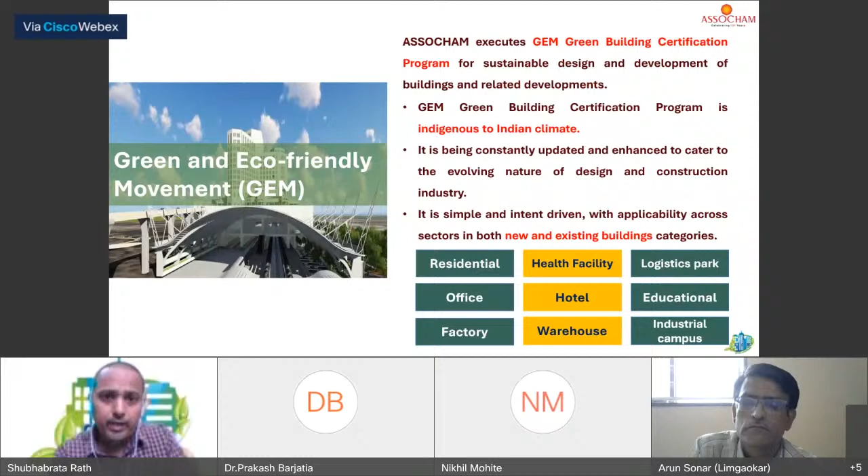It is indigenous to the Indian climate. It is updated constantly for Indian needs. It is simple, intent-driven, with applicability across all the sectors. You can say residential, healthcare facilities, logistics, education, hotels, warehouses, all kinds of new or existing buildings. Why are we trying to do it? What is the impact of energy in it? Okay, I will come to that part in a while.

Compliant with BEE ECBC. ECBC is the Energy Conservation Building Code. It's an Indian indigenous code, a very good guide for all of us that we developed. And with the 2017 edition, which is the latest edition of it, and the NBC, the National Building Code 2016, we are making all of these implementations in the green building sector: sustainability, energy and water efficiency.

You can see it is prominent in the second part. Fire and life safety, more green area, human comfort, fresh air. Even if you are talking about fresh air, energy has a part in it, directly or indirectly. Indoor air quality, same thing. Even daylight and energy have a connection. So energy is everywhere. In the United Nations SDGs there is a lot of emphasis, and GEM is being continuously improved to align with the United Nations SDGs 2030, and energy is a part of it.

The GEM green building advantages: like I told you, it is an indigenous program by a century-old apex industry chamber. GEM is the first indigenous program based on ECBC and NBC. It is an affordable certification program, at least 30% less than other programs existing in our nation right now. With sustainable buildings, if you're paying something extra, that can be recovered in 3 to 4 years, and the additional cost will be 6 to 10 rupees per square feet maximum. And there are regular interactions between GEM and project teams, even post certification. That's what we have added, and that's what we are committed to for everyone going for this certification.

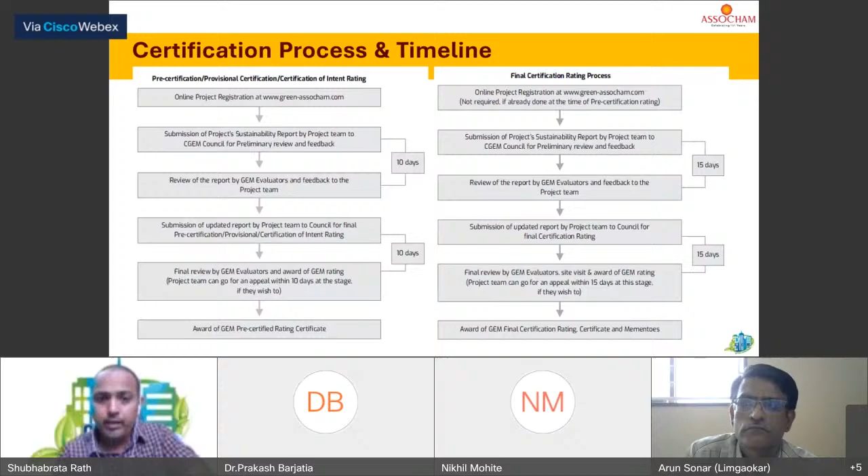It is listed by CRISIL among green building rating agencies. You can see the GEM certification program, and we have GEM level certifications in terms of different requirements, GEM 1 to GEM 5. There are a lot of principles in our program which are directly related to energy audit and commissioning. So we recognize energy audit as a need of the hour. That's why the ASSOCHAM GEM Green Building Certification Program has been empowered with Rajasthan Building Bylaws for extra FAR incentives, and some other states are also coming up in the near future.

There is healthcare, a green school, the land port terminal at Kartarpur, and it's not only a diversified portfolio in terms of types of buildings, it is also diversified in terms of locations in India. We can do that everywhere, because energy is not confined to cities only; it goes into all the details of our life, all sectors and places in all the states, and even villages. We can implement side by side, slowly.

And going towards the energy audit platform, we can develop throughout India. It is not only for any particular cities as of consumptions. So we deliver this plaque and certificate for GEM compliant projects.

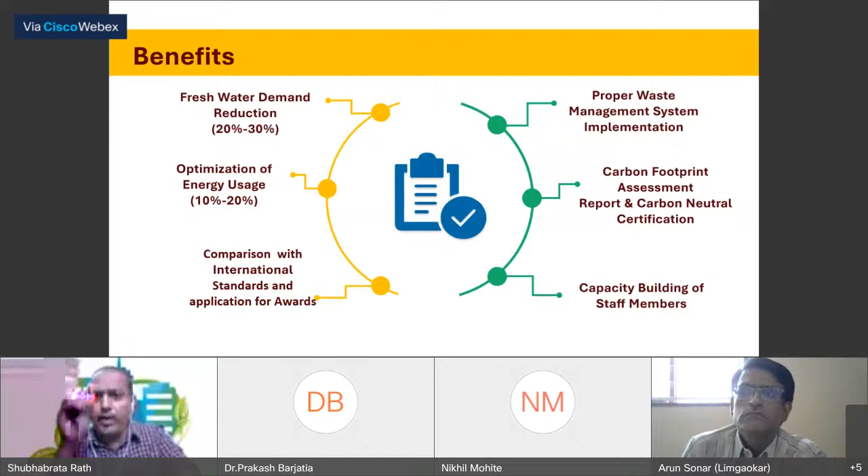Energy auditing is a much needed thing. Our keynote speaker and other eminent speakers will elaborate more on it. I am just trying to make a ground for it. So we have the benefits of all the audits, not only energy audit; any sustainability audit we call a green audit for universities. In the green audit, we have waste audit, water audit, carbon footprint audit, and energy audit. All this helps in certain ways, tangibly and non-tangibly, right?

So we have a pledge. PM Modi made this pledge: let us all pledge to create a green and environmentally sustainable country. Of course we should, and that's what we're trying to get at.

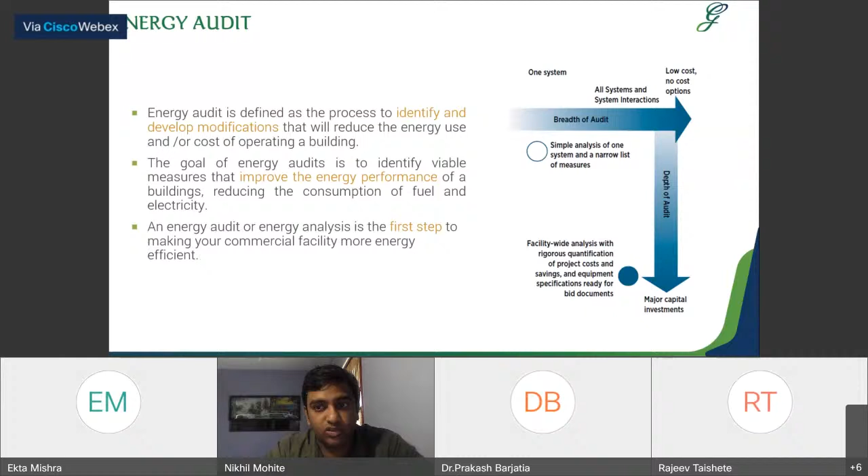And at the end of the energy audit, we try to find the conservation measures, and these conservation measures are normally low cost or no cost options, or maybe capital intensive. So the energy utilization index: during the energy analysis of the buildings, we try to get the historical data of the building, and we try to understand how the energy consumption of the building is. And for that, to understand the historical performance of the building, we use the energy utilization index, which is against the energy consumption.

We try to use influencing factors such as square meters of the building, the factors which have an effect on the energy consumption of the building, such as outside temperature. And we try to map the energy consumption of our residential building against this influencing factor. That is called the energy utilization index. So when we say that buildings have the same energy utilization index, that means the two buildings are compared with respect to the climate and with respect to the square footage of the building. So these are, for example, two energy utilization indices we are using in comparing the two buildings, and we can say who has more energy consumption.

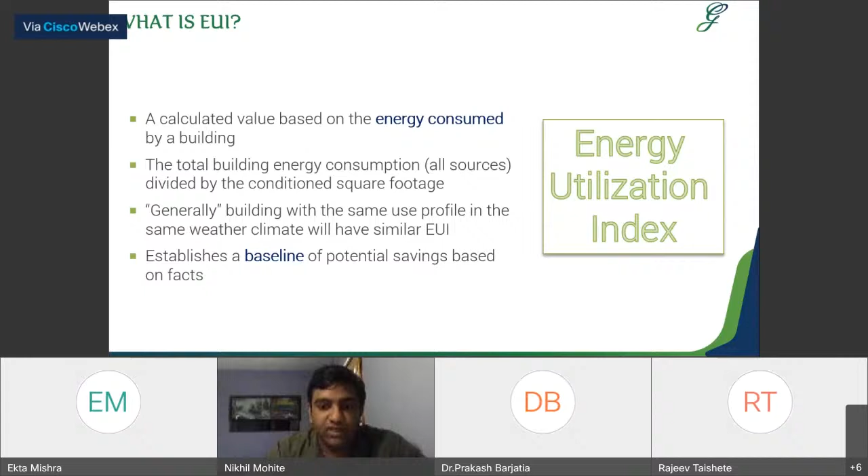So in this example, the building which has the higher energy utilization index can be set as the energy baseline, and then we can start identifying the potential savings with respect to the baseline. So to prepare the energy baseline, we use these energy utilization indices for the buildings. So, key elements of any energy audit: the first one is benchmarking and analysis of the historical data. And the second one is breakdown of energy use and analysis of the end uses.

So in the initial steps of the energy audit, we try to understand the type of the building, the principal use of the building. If the building is used for 8 hours or it is used for 24 hours for residential purposes. What are the different types of energy sources that the building is using? What are the different types of energy uses that the building has? What are the different costs associated with the energy uses? So these kinds of questions we come up with when benchmarking and analyzing the historical data, and then we try to understand the design conditions of the building

and the actual operations. So we try to compare the design conditions and the actual operations. We try to understand the operation and maintenance procedures in the first step, then compare it with the baseline. So this is the first step, benchmarking and analysis of the historical data. Then we try to break down the energy use, and in this step we categorize the energy consumption with respect to our on-site observations. So the categorization of the energy usage could be the percentage contribution of different categories such as lighting, HVAC, domestic hot water, laundry, food preparation.

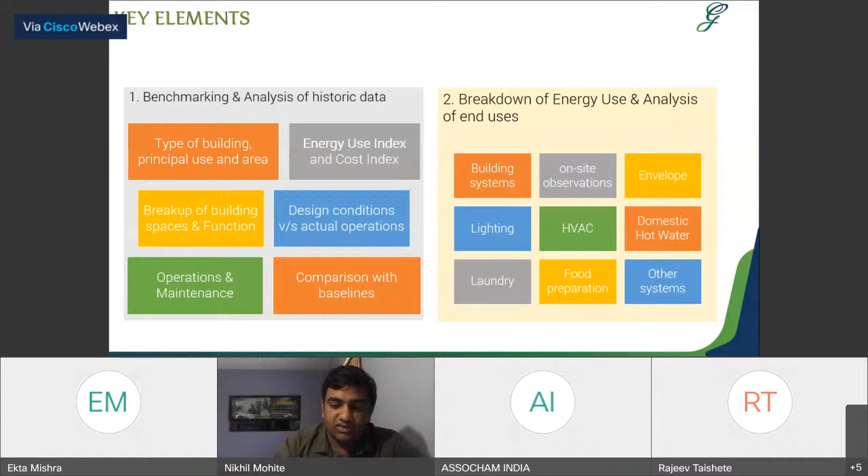We try to analyze, break down the energy usage of the building. And the third aspect is energy audit, engineering and the economic analysis.

So once we have identified the historical data, then we have identified the breakdown of the energy consumption, we go to the data analysis. After analyzing the data, in the energy analysis we try to get information about the present energy use, and we also take into consideration the cost of the energy sources. So our ultimate aim is energy conservation, and we try to estimate the energy savings with respect to the energy efficiency recommendations.

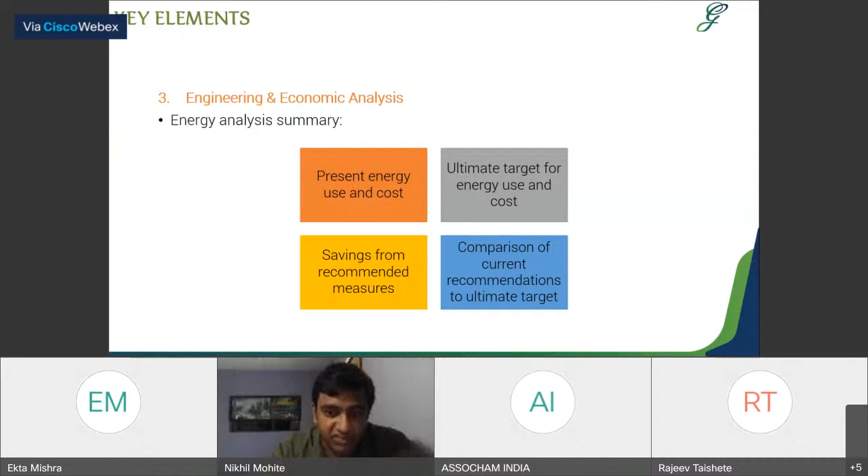So there are several frameworks available for conducting energy audits, such as ISO, International Standards Organization, the Bureau of Energy Efficiency from India, and ASHRAE Building Energy Assessment Professional standards. These standards have their own guidelines for conducting energy audits, which we can use.

For example, in the ISO 50001 energy management system family, the separate standard ISO 50002 has given the guidelines regarding conducting energy audits. So there are several steps which we can follow to conduct the energy audit as per ISO 50002.

Bureau of Energy Efficiency has also given certain guidelines regarding energy audits. The framework which Bureau of Energy Efficiency has given is that they have identified certain designated consumers, such as the manufacturing industries. Several sectors include cement, steel, railways, fertilizer, iron and steel, pulp and paper. These sectors have been identified as the major energy consuming sectors, and the leading industries in these sectors have been identified as designated consumers, for whom Bureau of Energy Efficiency has set goals.

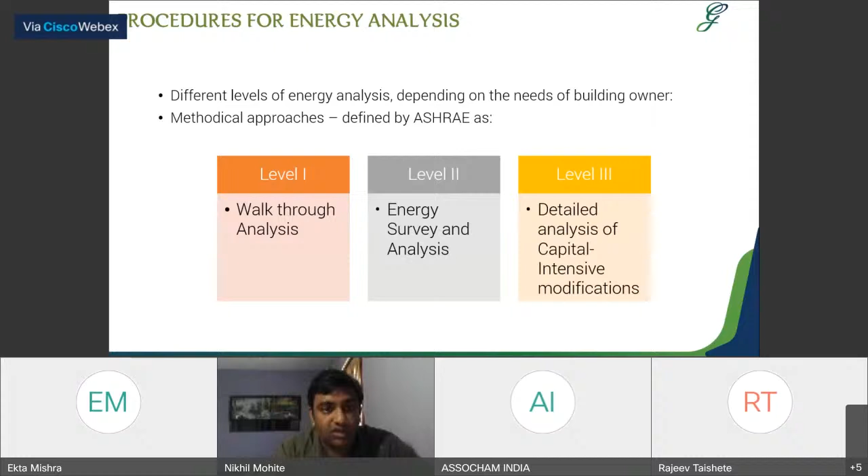But level 1 gives the input that can be used as an input to level 2, and level 2 inputs are used in the level 3 energy audits at ASHRAE. So we'll try to understand in detail what level 1, level 2, and level 3 are.

So as I mentioned, for each level, the energy audit process is the same. Initially, we will try to review the utility data before visiting the site, examining the utility data regarding energy consumption, mainly from energy sources used in residential buildings such as electricity or diesel consumption.

We'll try to get this information for as long as 3 years to understand the energy consumption pattern of the building. The more data we have, the more we'll understand the pattern of energy usage and the changes happening in energy consumption on a broader level with respect to energy sources.

Before visiting, we'll try to get information regarding the single line diagram or the building's systems diagram, and understand how the building was designed or its current usage. With respect to the single line diagram, we'll try to understand the energy sources, energy consumption, the energy consumers at the demand side, and how energy is distributed in the building.

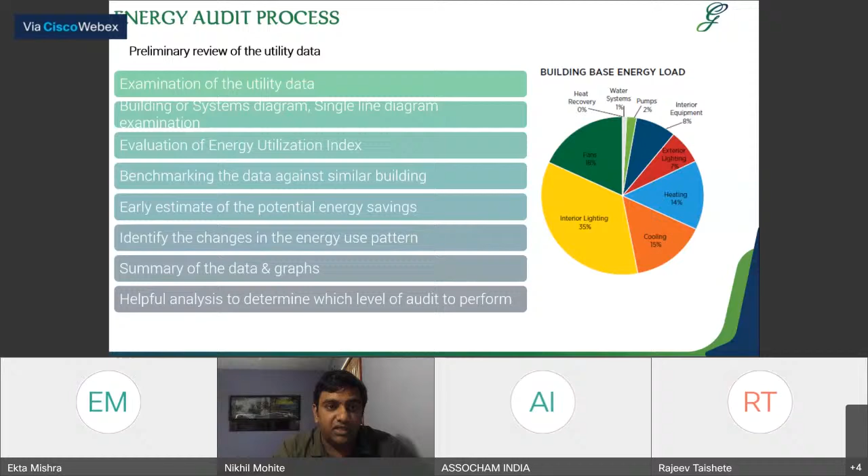So the second step in each level is the site assessment. Once we are done analyzing the initial data, we visit the site, and in the physical assessment of the facility and operations, we try to meet with the key operations and maintenance staff.

While doing the site assessment, whether you are in level 1, level 2, or level 3, the complexity and depth to which you conduct the site assessment depends on each level. Level 2 will be more on the equipment side, and we'll try to get a different operational view on the equipment usage.

We'll try to collect data with respect to energy consumption, such as doing energy measurements for the equipment, and we'll collect the data in this way. While doing the site assessment, we also get the construction details of the building envelope.

Then when we are collecting data for the chillers, pumping systems, or AHUs, we get data such as the rated capacities of the systems. Then we try to understand the control methods - what are the control methods being used.

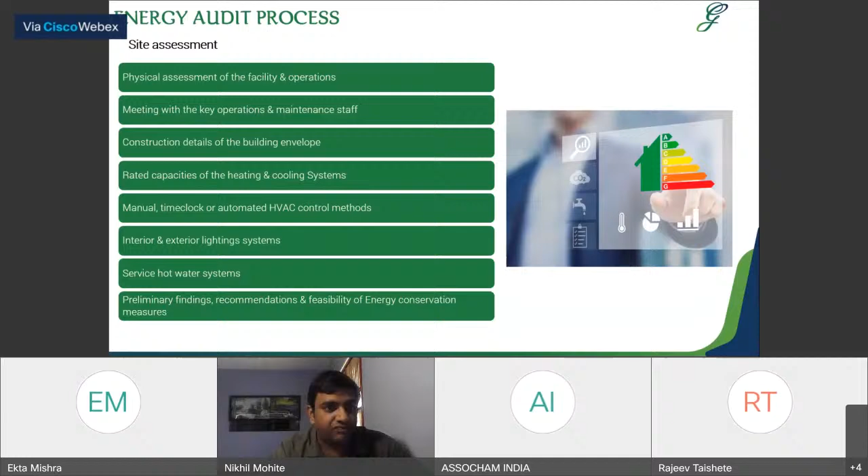So after review of the utility data and site assessment, we go and do the data analysis. Once we have the measurements and the data monitored, in the second step we come back and do the data analysis and try to find out what is the performance of the actual building.

This is related to the performance of the equipment that the building has been using. So what we do is try to understand the performance of the chillers, pumping systems, or the fans, and we try to understand the efficiency. We calculate the efficiency of these equipments and compare it with the rated parameters to see what exactly we are getting.

So the data analysis in energy audit is nothing but what is coming in and what is going out. For most equipment, what is coming in is the electrical energy. For a pumping system, what is going out is the hydraulic power. For fans, what is coming in is electrical energy, and what is going out is the fan power, or air power.

In this way we can analyze the equipments and calculate their efficiencies, compare them with the rated parameters, and try to find out different ways of conserving energy with respect to these equipments.

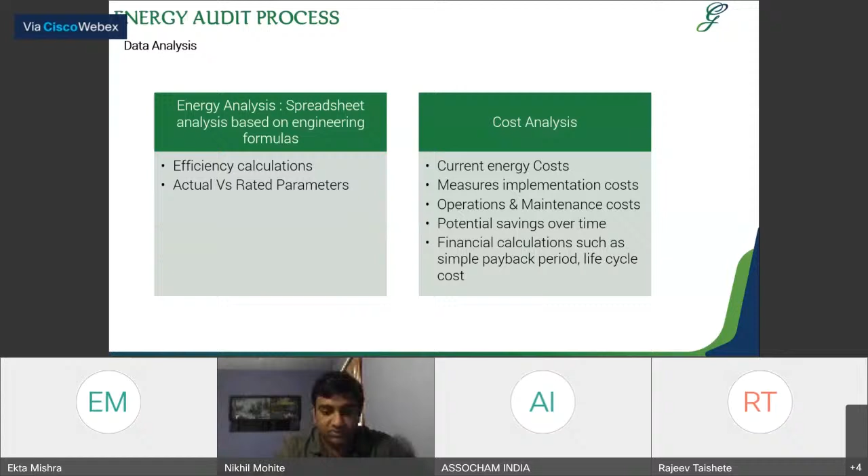The last step for the energy audit is preparing the energy auditor's report. Once we are done with the data analysis and preparation and identification of energy efficiency measures, we put everything into our audit report.

We talk about the future, what kind of steps the building owners have to take to meet the energy saving and financial goals. So we give a summary of the building's current condition and energy use, which comes from our initial preliminary analysis.

Then we discuss the list of recommendations, energy saving recommendations with respect to low cost and longer term energy efficiency measures. We also discuss monitoring of the energy consumption and utilization in the future, and how the building can monitor that energy consumption.

We have seen in buildings that many times they are only monitoring the energy consumption, and there is no real system at all. Whatever system the building has in place for collecting data, they might not have automated data generation, but they have personnel working on collection of the data, so they are only monitoring the energy consumption.

They are collecting the data, and they have data for the last couple of years or three years, but there is nothing done with it. They have not done any energy analysis with respect to that generated data, and have not come to any conclusion, just because some company advertised them about doing the data monitoring, and they have been following this.

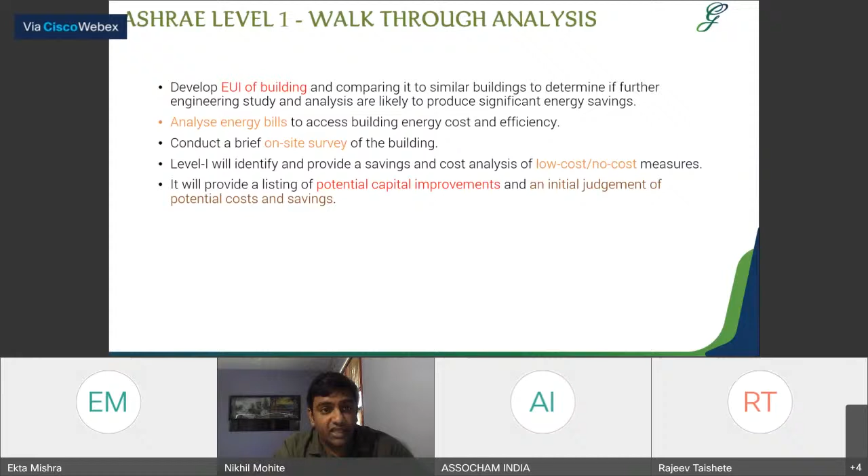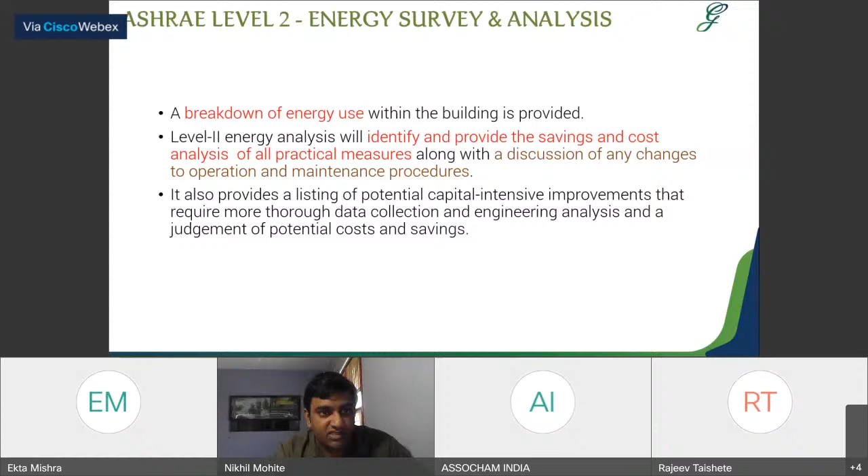Here we will not include, but just mention, the capital intensive projects which need more capital and require more data to analyze to establish that there are energy saving opportunities. This input from ASHRAE level 2 we'll use in level 3. Level 3 is the detailed analysis of the capital intensive modifications.

Once we have identified a few capital intensive modifications, we'll try to monitor the energy consumption of certain parameters, certain equipment with respect to the identified energy conservation measure, and understand the load, the energy consumption pattern, whether it is changing with respect to the load, or how the energy performance of the particular equipment is. That's how we will do the capital intensive modifications to realize the energy saving opportunities.

We'll try to gather as much data as possible, do the monitoring for a certain period of time, and then analyze the data. Then we will come to the cost benefit analysis, and do the cost and energy saving calculations.

So this is a brief summary of the level 1, level 2, and level 3 audit reports. The level 1 audit report is only a walkthrough survey. It has an executive summary, brief description of the facility, scope of audit, preliminary analysis findings including benchmark and end use results, only the low-hanging fruits such as no cost and low cost energy conservation measures, and potential measures for further consideration. Here we only mention that there is a potential, but further study needs to be done.

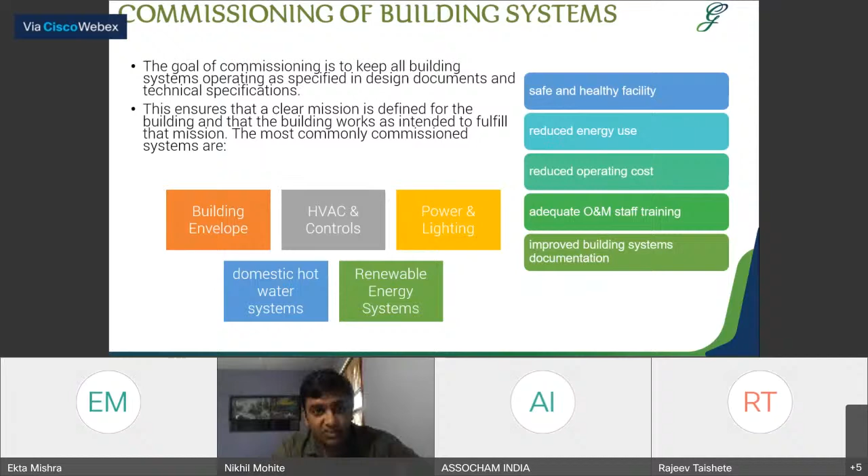So why do we require commissioning of the building systems? Because it reduces the energy use and the operating cost of the building. It also keeps the staff working inside the building, or the people living inside the building, safe and healthy. And it also improves the building system documentation. Sometimes, once the building comes into use, after a few years there are lots of changes, and no one has really made changes in the documentation. When we do the commissioning of the buildings, we come to know the current scenario of the building against the design scenario a few years back, and we can change the documentation.

So the commissioning process mainly includes different types of commissioning: initial commissioning, ongoing commissioning, and retro-commissioning. The initial commissioning is normally done for newly constructed buildings. It starts with commissioning planning, first with the owner's project requirements. The owner gives the requirements to the design team, they prepare the basis of design, and then the actual process starts. The contractor comes into the picture, they order the equipment that is required, and we do the startup procedure.

Then the commissioning provider comes into the picture. The commissioning provider will review the design and the installations, and will also ensure the startup of the components and systems. Then they will do the performance testing, whether the equipment is running accordingly, and prepare the system operation and maintenance manual. They will train the personnel and see if the system is responding to seasonal changes. They'll do the first operational review after 10 months of operation, and it will go into ongoing commissioning. So the initial commissioning is done mainly for newly constructed buildings.

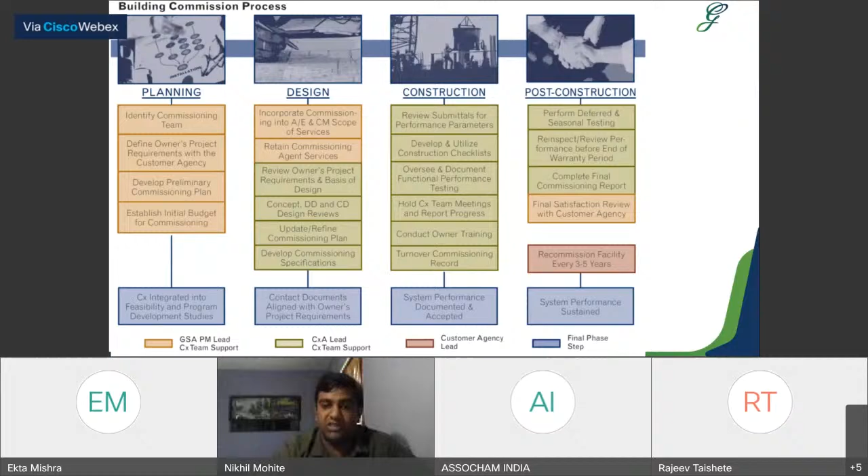So why should we go for the commissioning? Because as we use the various equipments such as motors, the fans, and the chillers, etc., they will wear down with use, and there will be some sort of unbalancing or misalignment, causing various problems such as vibration and noise. The controls and the sensors will also deviate from their intended use as per the design. And over the years, we also need to see whether they are working properly and proper controls are given to the sensors.

If the building is old, as old as 10 years, there will be many changes in the building with respect to the ducting, for example, and we also need to see if the changes in the building are included in the documentation. And over time the indoor air quality issues can worsen, providing an uncomfortable environment for the occupants. This is not good for the benefit of the company when the indoor quality issues are not taken care of. So such kind of issues we can also take care of

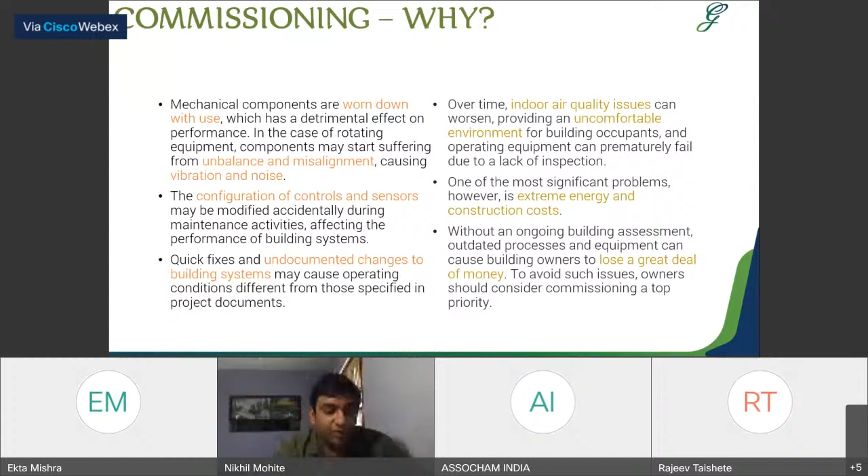Then we'll start preparing the operation and maintenance manual. We'll train the operation and maintenance personnel with respect to the commissioning output and how the system should be running. After this, in the first year after construction, we'll do the seasonal commissioning as well, whether the systems and the equipments are responding to the seasonal changes.

And in the post-occupancy, we'll try to do the operational review after 10 months. And this will be the end of our initial commissioning. So this initial commissioning will be the input to our ongoing commissioning.

So in the first year of operation, the systems that we commission during the initial commissioning, the retro commissioning or the ongoing commissioning are mechanical ventilation systems. We'll see the ductwork cleanliness, whether the insulations are in place, and the operation of the AHUs and outdoor units, whether they are performing as intended. Then we'll try to understand the operation of exhaust and supply fans.

On the cooling side, we'll try to understand the performance of chillers, cooling towers, pumping systems, window air conditioners, split air conditioners, VRF systems, and precision air conditioners in the case of data centers. Heating systems in residential buildings have boilers or heat exchangers.

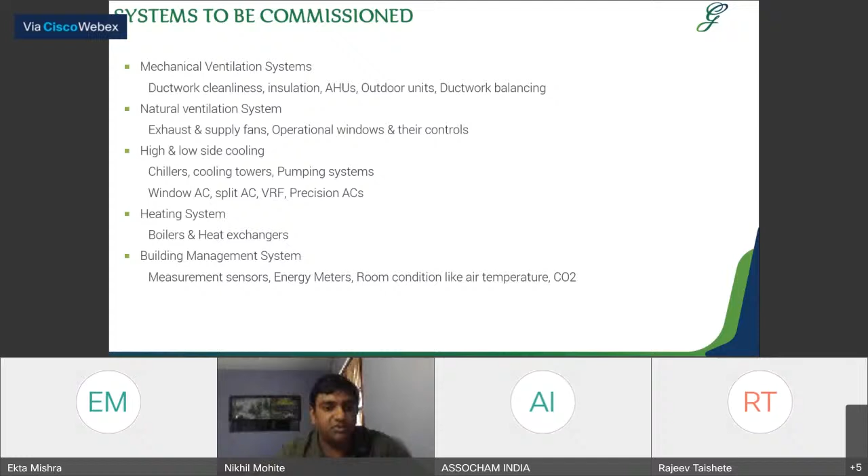As mentioned earlier, the initial commissioning activities: the owner's project requirements, then we identify the key performance indicators. Then the basis of design is prepared. Then the team will nominate the commissioning provider, who will do the commissioning planning. Then the data metering will be done. After the contractor submittal review, installation and inspection of the system components will be done.

Once the startup is done, functional performance testing is carried out. Various issues are identified, whether the equipment is working as per intended use, and once they are rectified, the commissioning provider along with the contractor will prepare the operation and maintenance manual and system operation manual. Then they will train the staff, and seasonal commissioning activities will also be carried out. There will be one operational review after 10 months of occupancy. So that was the initial commissioning.

Then we'll go for the retro commissioning. Old buildings which are more than 10 years old and were never commissioned, as we discussed before, what can they do? For them, retro commissioning is one way to identify the changes and whether the intended use of the equipment is still there. If there are any changes in the systems or equipment, these could be included in the documentation also.

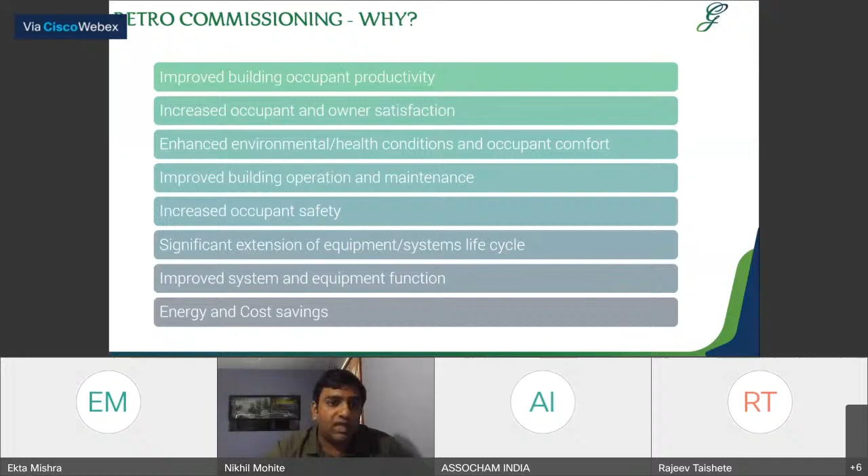The third is the ongoing commissioning. This starts after the initial commissioning, after a few years. The ongoing commissioning is more about the data collection, and this is based on ongoing collection and analysis of the energy data. So the data metering step which we followed in the initial commissioning comes in handy for our ongoing commissioning. The existing building automation system generates a lot of data, and this data is analyzed in ongoing commissioning to reduce the number of errors being made.

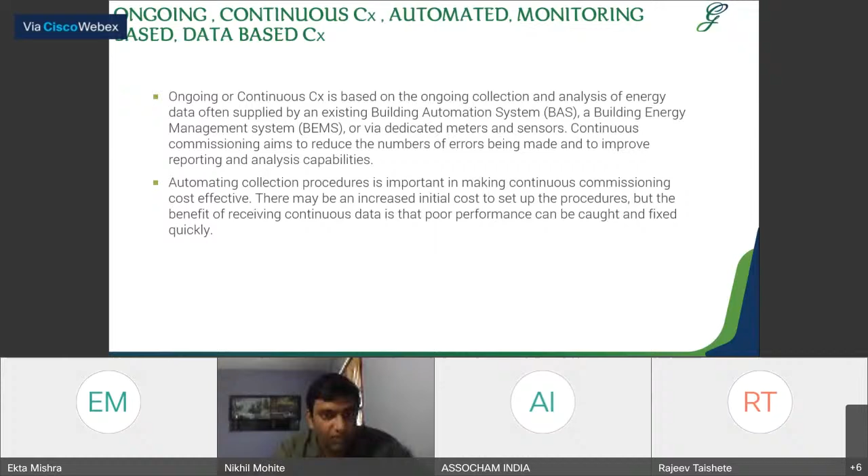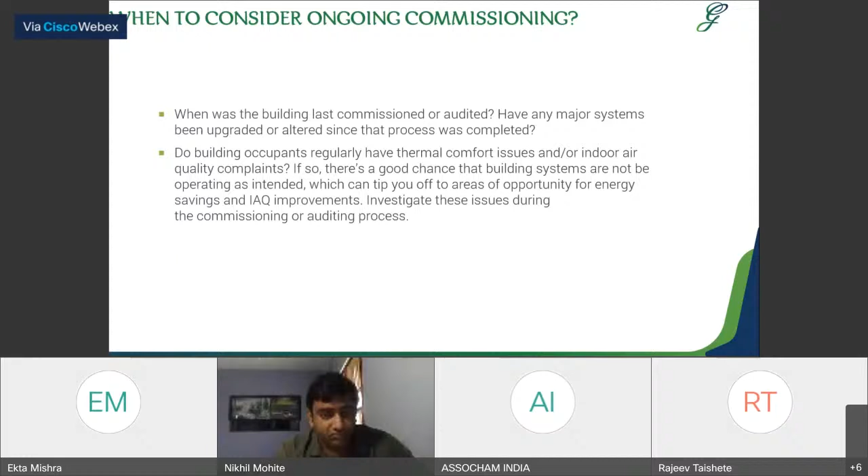So when to consider ongoing commissioning? When was the building last commissioned? Once we do the initial commissioning, and then after a few years we have not commissioned the building, we can consider this option. If there are many major system upgradations or alterations since the process was completed, and there have been any issues identified by the occupants, and they are continuously giving complaints. After doing the initial commissioning, if there are any thermal comfort issues or any complaint issues from the staff, there is a chance that the building is not operating as intended, and we can investigate these issues during the ongoing commissioning.

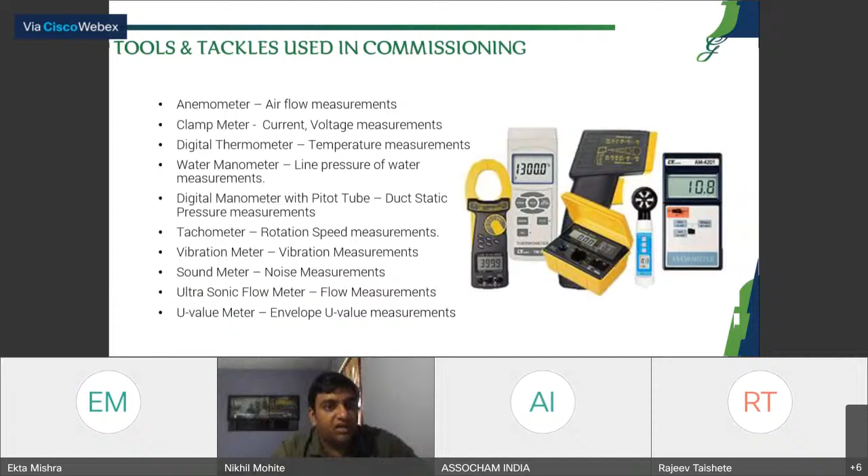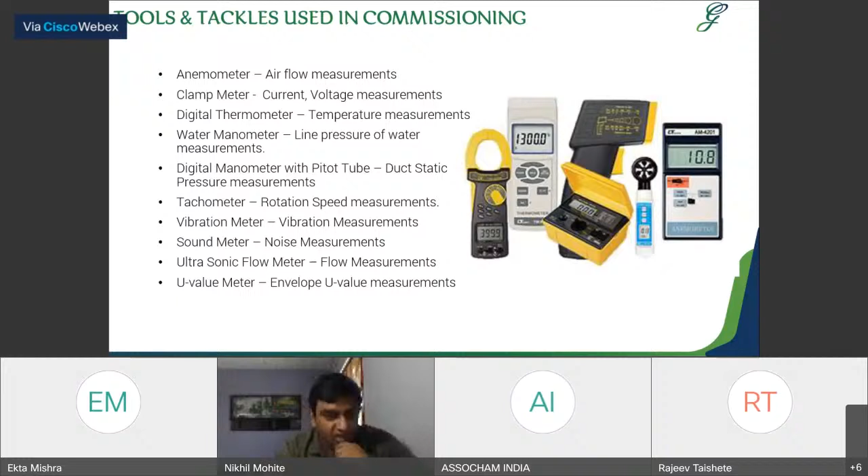The various tools used in commissioning are very similar to an energy audit. To conduct airflow measurements, we use the anemometer. For analyzing energy consumption, for measurement of current and voltage, we use a clamp meter. For temperature measurements, for the chillers and cooling towers, etc., we use a digital thermometer. To understand the pumping systems, we use water manometers to measure line pressure. We also use the pitot tube to understand static pressure measurements. Then a tachometer to measure the rotations of the motor, etc. And to understand the vibrations of the various equipment, we use a vibration meter.

The commissioning agent is the commissioning provider, which has a bigger role in the commissioning process. From the initial stages of the pre-design phase, commissioning agents are part of the process. They review the construction documents, comment on the construction submittals, and review the construction on the field. So they also participate in the processes.

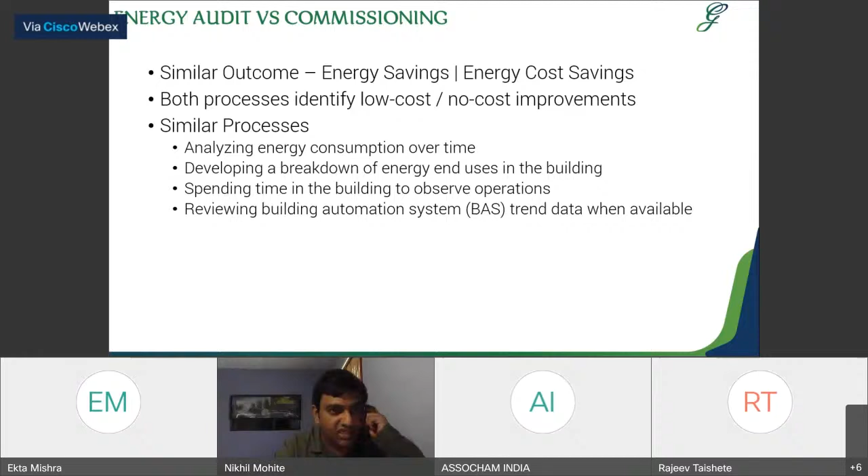So we'll go to energy audits and commissioning. What are the differences? First, we'll talk about the similarities. We have a similar outcome while conducting the energy audit and commissioning: energy saving and energy cost. Both processes identify low cost and no cost improvements. The process also includes similar steps such as analyzing energy consumption over time, developing a breakdown of energy end use in the building, spending time in the building to observe operations, reviewing the building automation system, etc. So these are the similarities between energy audit and commissioning.

The main difference between the energy audit and commissioning is the functional testing we do with respect to the instruments. This is something we do not do in the energy audit. When we are doing the functional testing of certain equipment, we want to see whether they are working as intended, whether the blowers are turning on or off with respect to the temperature inside the building. When we consider an evaporative cooling system, for example, if there is a pumping system pumping the water inside it, whether it is responding to changes in the temperature inside the building. Such functional performance testing we do in the commissioning process.

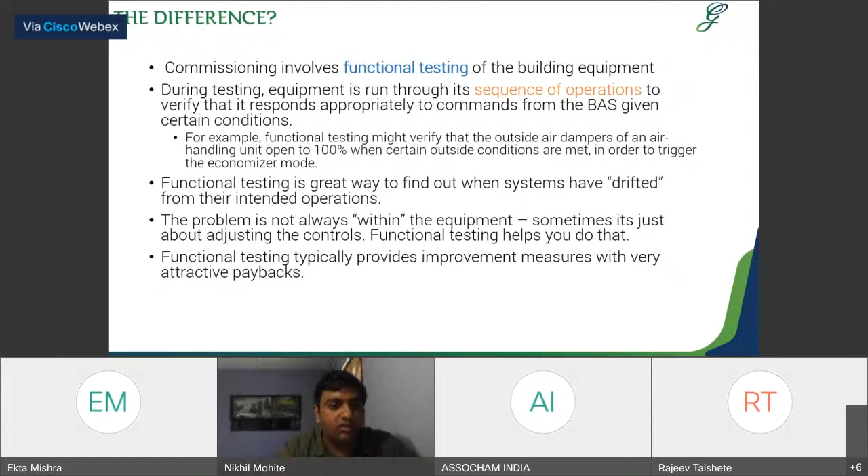So the objective of the energy audit and the retro commissioning is the same: identifying cost-effective upgrades. In retro commissioning, we try to understand whether the systems are performing at the intended level of performance. The primary focus during energy auditing is identification of projects which will generate energy savings. In the commissioning process, we try to understand the processes, building controls, and operational measures, and whether they are giving the output which was intended.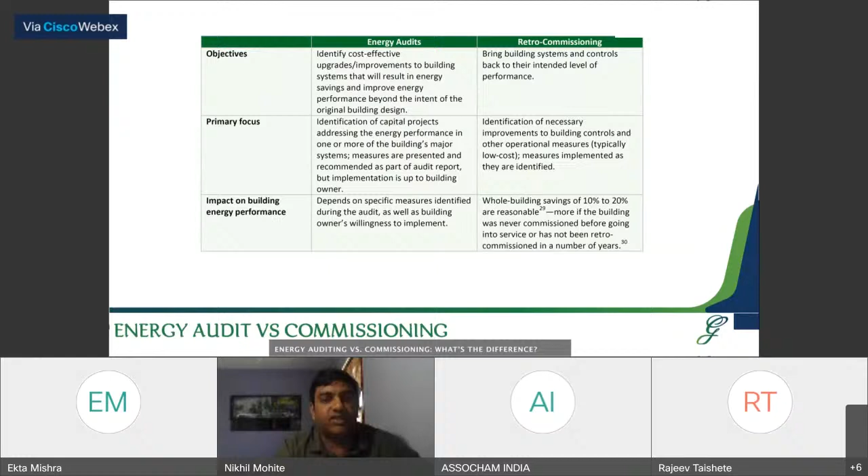In the process of energy audit versus commissioning, the steps we follow are very similar, although the energy use breakdown is more important with respect to energy audit, and not so much importance in the commissioning process. Capital improvements are a requirement of our level 3 energy auditing, but that is not required in the commissioning process. System sequence of operation testing, system functional testing, and data and trend logging are more important in commissioning, where we check whether the controls are operating as intended.

So I'll go to the case studies. One case study of fans or blowers: how we conduct the energy audit for the fans or blowers.

When conducting the energy audit of the fan, we try to understand the performance parameters of the fans or blowers. To come to a conclusion about their performance, what we measure in the field is, as we discussed, what is coming in and what is going out. In case of fans, that's the air power, and to understand the air power we have to measure the airflow inside the fan.

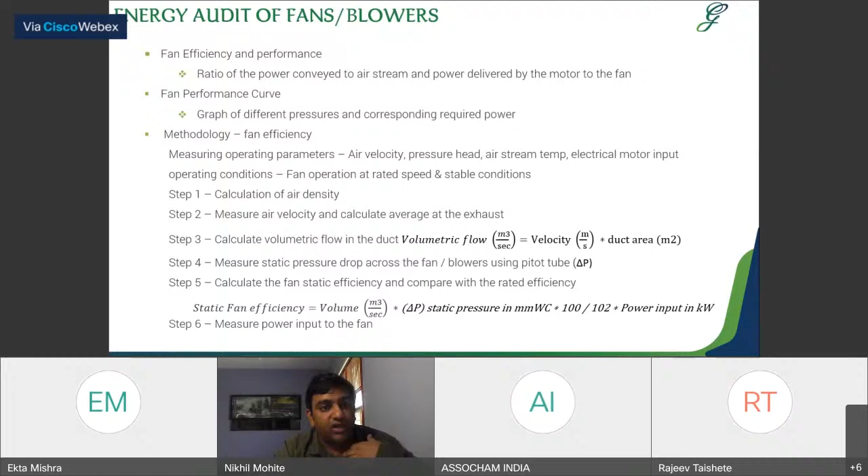Once we have the static fan efficiency, we compare the operation with the rated operation. We do the data analysis with respect to energy auditing, trying to understand whether we have chosen the right fan -- whether the fan is undersized or oversized.

We try to reduce the system resistance and move the operation of the fan closer to the best efficiency point. We try to understand the fan performance curves and where the fan is operating at the moment, and if the operating point has moved from the best efficiency point it had when installed, we make changes in the operation of the fan to move the operating point back to the best efficiency point.

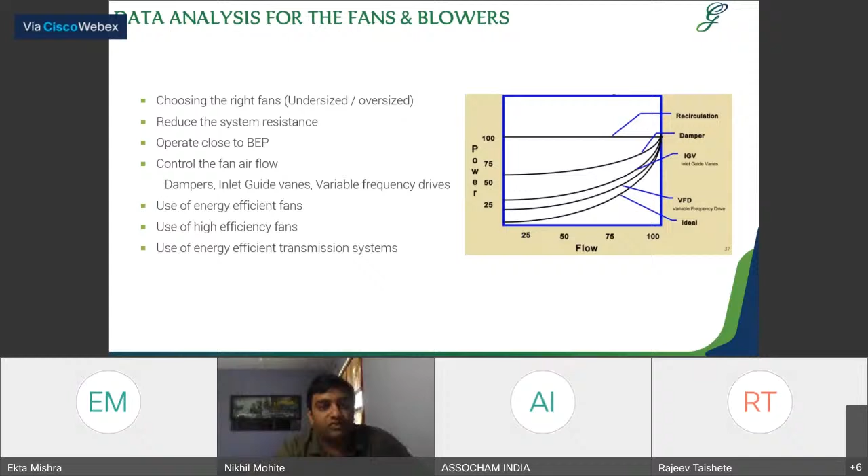We'll also see what we exactly do when commissioning the fans or blowers. In the commissioning phase, we try to understand the startup manuals, installation manuals, sequence and control strategy, and the operation and maintenance manuals. During installation, we check the general installations and the electrical part, getting the electrical parameters and seeing if they are less than full load amperes. Such observations are what we do.

If there are controls given to the fans or blowers -- for example, once the inside temperature is above 30 degrees Celsius, the frequency of the blower changes accordingly and the fan runs at the highest frequency of 50 Hertz -- and as the temperature comes down inside the building, say to 27, the fan starts operating at 25 Hertz. We check whether the fan or blower responds to such changes. These observations are more important in the commissioning phase.

So other observations we have made during the initial commissioning was in one particular building, the indoor units were interlinked with the fresh air fans. During the commissioning, we understood that the fresh air fans were not operating at all, and there was no interlinkage at all. This happened for each and every floor. The contractor had done some wrong connections with respect to the electrical, and they were not operating at all. So this type of problems we can understand during the commissioning.

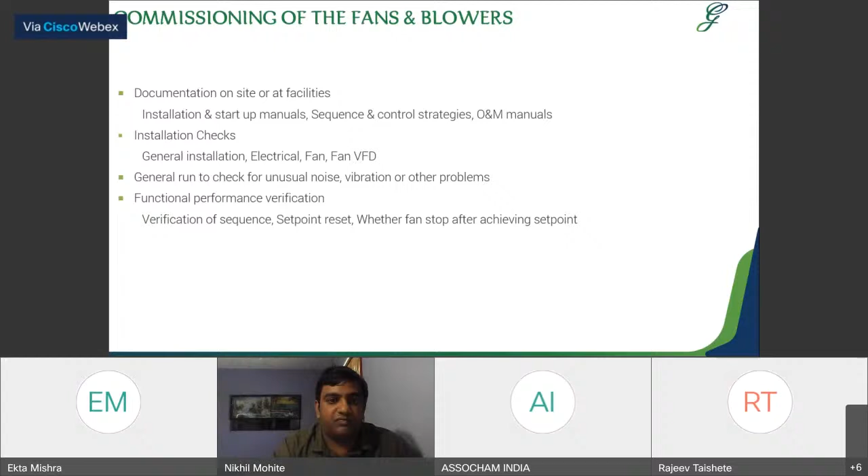Hello. Thank you so much, sir. Indeed, it's a great presentation for energy audit and commissioning. We have many questions regarding this. So should I ask you a few questions? Yes, definitely.

The question is, what is the best way to become a certified energy auditor, especially in India? As far as I know, to become a certified energy auditor, you can always start to work in the field of energy, and more requirements are with respect to instrumentation, if you can conduct any measurements. So after acquiring a few years of experience, you have to go and attend the exam of Bureau of Energy Efficiency for Energy Manager and Energy Auditor.

Is there any limitation or time slot for this examination? It happens only once in a year. You have to just show the required experience, and then you can attend the exam. There is no limitation as such.

Next question is: out of the 3 standards, which is the best standard for energy audit and useful? That depends on your requirements. If your building is not that complex and it is very old, you can go for a level 1 audit, try to get the low hanging fruits, and then go for the level 2 audit. If your building is quite complex, you can simply go for level 2 audit at least. But that also depends on your budget and what kind of results you want. The deeper you go, definitely it is beneficial to your building.